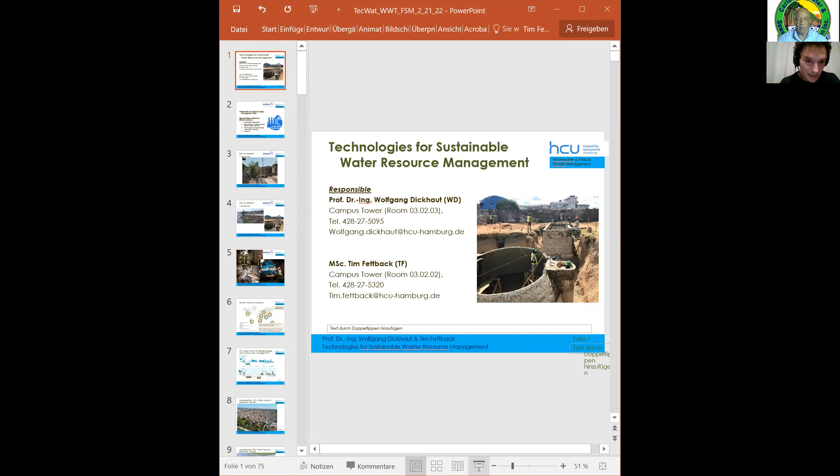I went to the HafenCity University in Hamburg, where I'm doing my PhD in relation to faecal sludge management, so the sludge which is accumulating in the pits. And there I'm thinking about the institutional and financial arrangements. So how to get the whole system more efficient, because in the end you can have a very nice technology. If it does not work efficiently and it's too expensive, it will never scale.

So the question is, how can a more efficient system, what would it cost in the end, and can this be carried by the beneficiaries, so in the end over a kind of sanitation levy or taxes. And at the same time, I'm also lecturing in a course which is called Technologies for Sustainable Water Resource Management. And I would like to present one of these lectures to you, looking into fecal sludge management, and let's see how far we get, also decentralized wastewater treatment.

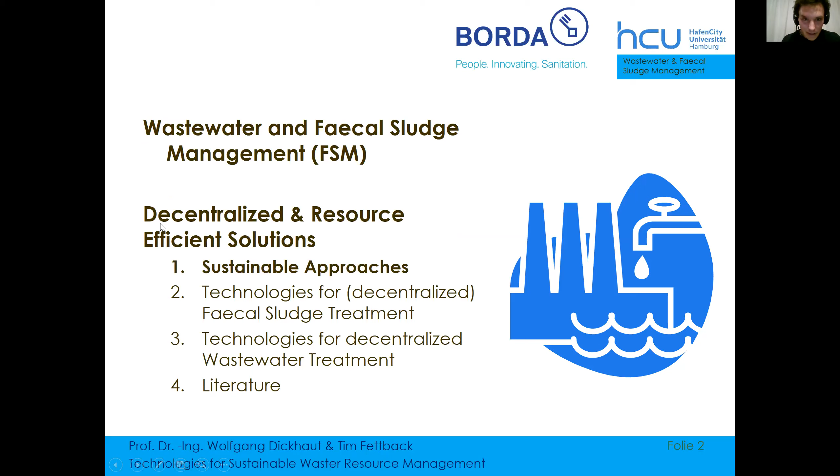So basically, today I would like to talk about decentralized solutions, resource efficient solutions. And before really diving into the solutions, I would like to talk a little bit more about general principles which we try to follow in sanitation planning. And then, of course, this reflects also to the technologies themselves and also the operation and maintenance of the systems.

So generally, you already see here the two different terms, wastewater and fecal sludge management. I can imagine most of you are aware of the difference. So fecal sludge is all that is accumulating in the pits and the containment systems on site, and wastewater is anything which is flushed into a sewer system and then treated off-site. So there we have two different technologies, approaches, value chains, management systems, institutional arrangements. So this really has to be seen as two different systems.

I just had a fast look and I saw that also in the Caribbean, about 50% of the systems are on site and about 50% are sewer systems. Correct me if I'm wrong, but then fecal sludge management is still a significant portion. And I also saw that about 80% of the wastewater is not treated, but discharged to the ocean, mainly to the Caribbean Sea. So I can imagine that wastewater treatment is also one major aspect. So I would like to start again with a picture.

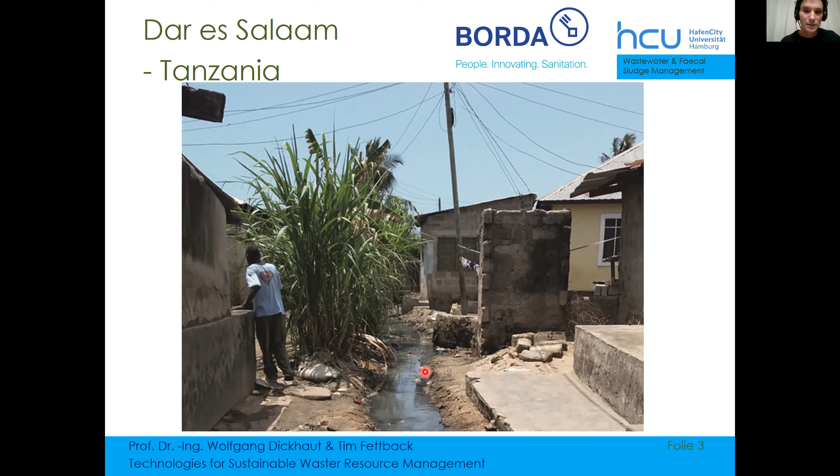You could almost say this is part of the system, because the toilets are constructed so that basically the sludge is flushed out of the system. That's one of the main emptying methods, which of course leads to a high load of organic pollution, affecting environmental health.

We'll have a lot of nitrogen and phosphate in our water bodies, leading to eutrophication. We also have organics in our water bodies, which reduces oxygen until we reach anaerobic conditions, and then the whole ecosystem collapses.

Of course, we also have exposure of human beings to pathogens, mainly from the excreta. You can imagine this is a normal road, so people walk here, children play here. So there's a significant risk.

At the same time, we also see some urban informal agriculture, some sugarcane growing, where you can see a benefit: the nutrient-rich water is a potential resource that can be used for irrigation, and then does not have to be treated to such a high level, because the nutrients are a benefit for irrigation and not necessarily to be removed, which is technically also a big challenge to get the nitrogen and phosphate out of the wastewater.

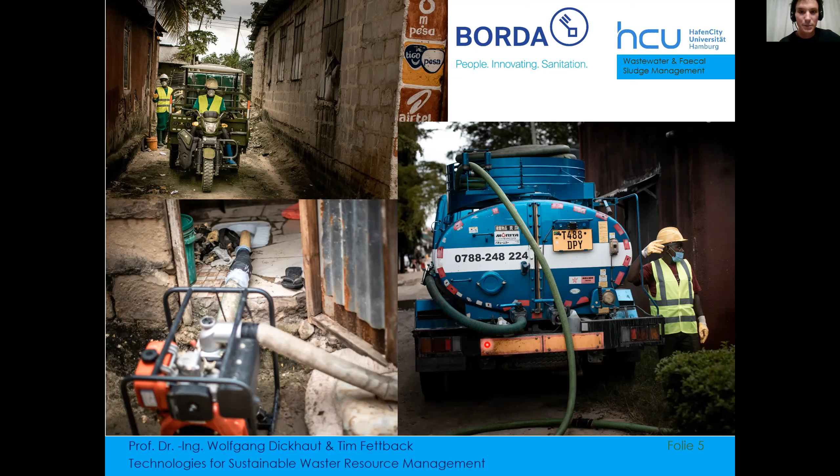Down here again, the picture of a kind of solution we are trying to implement. On the other hand, you have wastewater treatment with sewer systems, but also fecal sludge management. This is not only about the treatment; we have the whole value chain.

We start at the containment system, and then it has to be emptied. The design of the containment system influences its emptyability. If there's no access to the containment system, we cannot use a conventional truck, so we have to have other solutions.

For example, this is a trash pump, which can also pump some kind of particles, maybe 2 millimeters in particle size. There are lots of other systems as well.

But then the other issue is you have to be able to enter the containment system. Often operators get to the pits and then have no access because it was completely closed, so they first have to break the walls of the containment system to re-access it.

After emptying, we go for transportation. There are several different types. We have good experience with smaller tricycles, which can easily enter densely informal neighborhoods with small roads, and also have lower investment and capital costs compared to the sludge truck.

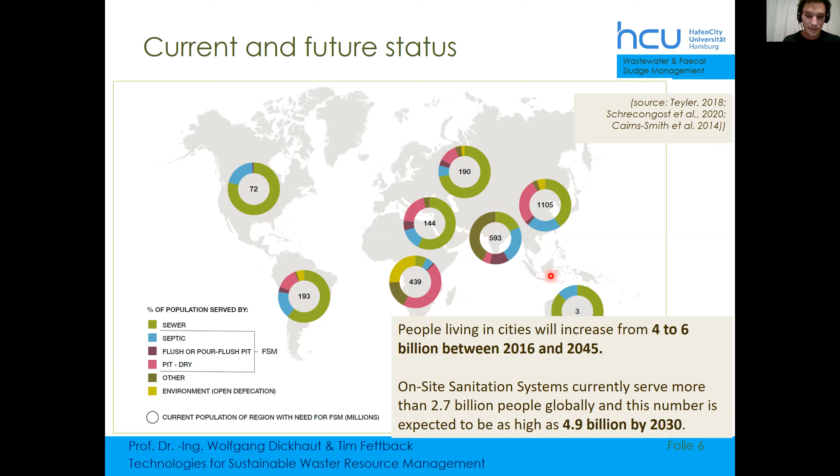They are also easily available. In Tanzania, sludge trucks usually have to be imported secondhand, which is quite a process, especially for small entrepreneurs.

Globally, we can see that on-site sanitation is the dominant system. At the moment, we have about 2.7 billion people depending on fecal sludge management of on-site systems. We still have a significant amount of open defecation and other environmental systems, especially in Africa. But the number in the middle is the people dependent at the moment on on-site sanitation systems, which is septic tanks, flush or pour flush pits, or dry pits. They all need frequent emptying of the sludge, which then has to be transported, treated, and reused. The projections show this going to 5 billion people by 2030, so we have a huge demand in the next years.

In the Caribbean, I cannot say exactly, but as I saw it, about 50% have on-site sanitation systems, and I think the population growth is not as strong. Nevertheless, it might be possible to learn from other regions. Especially, we have much experience in the Southeast Asian regions, who already started to scale up solutions for fecal sludge management.

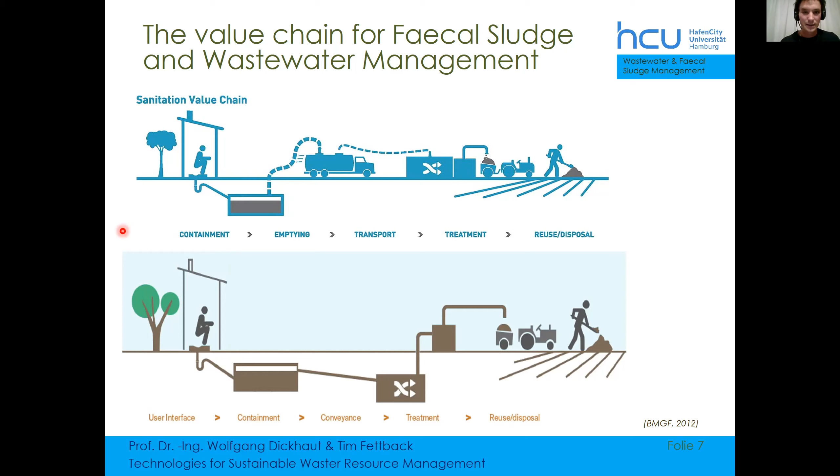If we go into the value chain of a wastewater system, we have one significant difference: we don't have the emptying and transportation, but we have a conveyance. Conventionally we don't have a containment system, but this is optional. If we have a containment system in a wastewater system, then the sludge also accumulates there, and we would need emptying and transportation again. We would have a special type of wastewater system, a solid-free system with a simplified sewer system, with a big advantage compared to fecal sludge management - a complete treatment of our wastewater. With fecal sludge management, we only treat the sludge in the end. There will always be something missing: the infiltration into the soil. So our partially treated liquid fraction of wastewater will be infiltrated on site.

This is like a first step, and it is a much more feasible step. That's why now, over the past 10 years or longer, it is going more and more in the direction of really acknowledging that in most parts, the wastewater system will not be implemented in the near future, but safe and environmentally friendly fecal sludge management is achievable and should be the first stage. If we talk about safe, of course, we try to reduce the risk for the environment and the risk of any contact with pathogens and human beings.

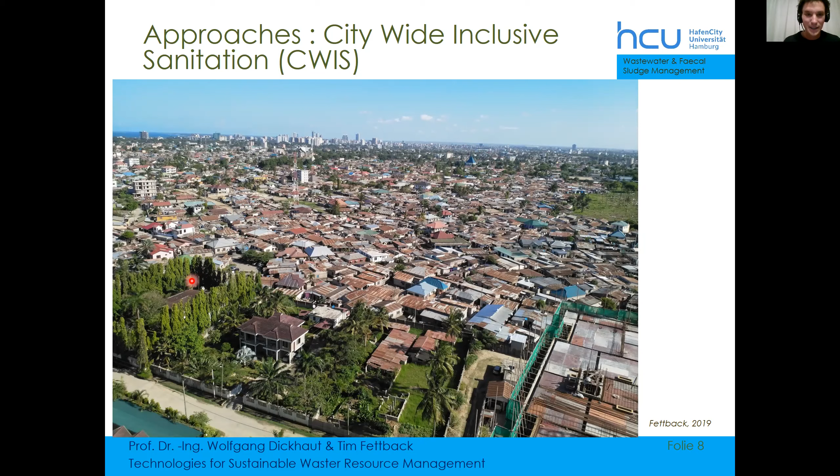But this is a very small part of it. From here, there are some sewer systems which bring wastewater untreated into the ocean. Then we see the informal settlements in the foreground, basically a residential area, though there will also be some small medium enterprises in it. We see that accessibility is very difficult, so there might be one road going somewhere, but we can't even see it anymore.

A truck can pump the sludge about 50 meters, maximum 100 meters. How will a house which is more than 100 meters away from a road be served?

We also see that there will be quite a variety of income. Here in the front, there's a reasonably large building with a beautiful plot. This people might be of higher income compared to just the neighbor behind them. At the same time, they are directly at the road with nice access, so a sludge truck would have an easy job entering and emptying the pits, even though this one might also not be connected to a sewer system. Having that access is easy, the costs for serving are low, and at the same time the ability and willingness to pay are also quite reasonably high.

As an expectation, we also see something like a church here. How is wastewater generated at the church, and how do we provide toilets here? We see a cemetery, which might also have an impact on water quality. So you can imagine how many different entities, stakeholders, and interests we have here that need to be aligned.

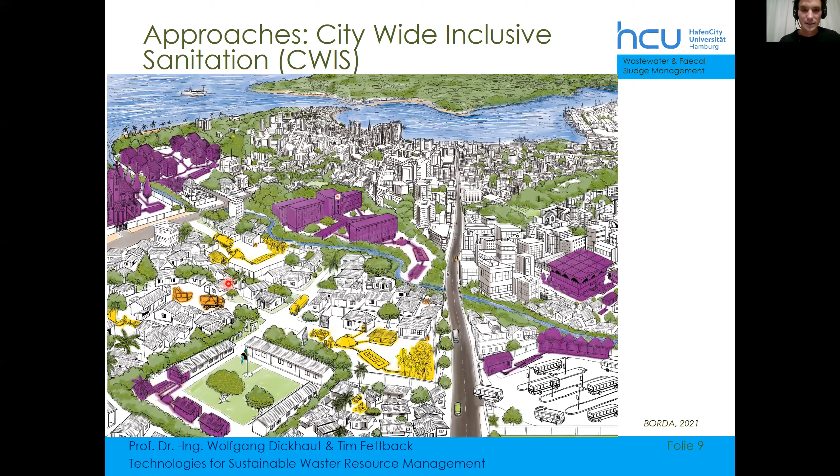Coming back to fecal sludge, we can imagine how big the variation is of fecal sludge which gets to our treatment site. Depending on where it is collected—say at this bus stand, there's no decentralized treatment plant, only a pit or septic tank—the sludge collected here stays a very short time in the containment system. So basically there has not been much decomposition of the organic matter before it is emptied and transported to our treatment plant.

We might have other systems which are not lined, with good percolation into the ground. These containment systems might fill up only after 10 years, and the characteristics of that sludge are then quite different—the organics are already quite far decomposed, while the COD, the difficult or slow degrading, not biologically decomposing organics, are still in our sludge. This has, of course, an impact on our treatment system.

As I mentioned before, if there's solid waste going into our sludge, or wrong management of the toilets—for example, we observe salt or even battery fluid being put into the pits because it is believed, or partly true, that it reduces the smell—we can end up with heavy metals or salt in our fecal sludge, which has a big impact on the biological treatment systems we implement.

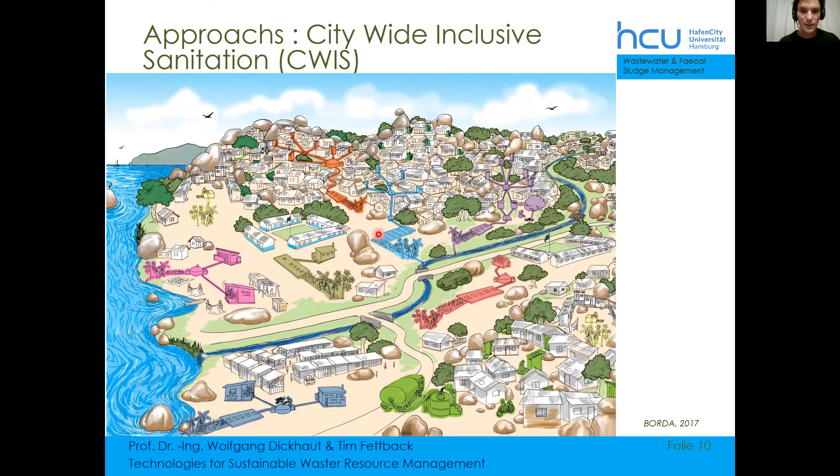Other options could also be something like a simplified sewer system, which connects several households, simplified in a way that it's not too deep—a shallow system that operates without any electrical energy, so no pumping required. We can also think of having a settler at a reasonable, accessible place, from which only the liquid continues and gets treated at a lower level, while the sludge accumulates there, and the sewer system following the settler can then be even more simplified.

Again, similar principle, looking at different types of discharge. So having something like a constructed wetland, maybe also an irrigation, and it can have an overflow to a water body, although we always try to avoid any discharge to water bodies, because once we discharge to water bodies, the requirements for the effluent quality is of course much higher. And if we can reuse it on site, we always try to do that.

And in the bottom corner again, the fecal sludge management for areas where no sewer systems can be implemented. Of course, one major criteria for sewer systems to be implemented is also the water supply. So if there's no water supply, then better to go for dry toilets and to save the water.

And actually here in Mwanza, they had a quite good concept also for recovering the costs. So the hilly areas were not yet connected to water supply. So they went directly hand in hand and said if any household wants to be connected to water supply, they also have to be connected to the simplified sewer system. And they directly from the beginning also collected a sanitation levy. So on top of the water bill, a certain percentage was added for the wastewater management.

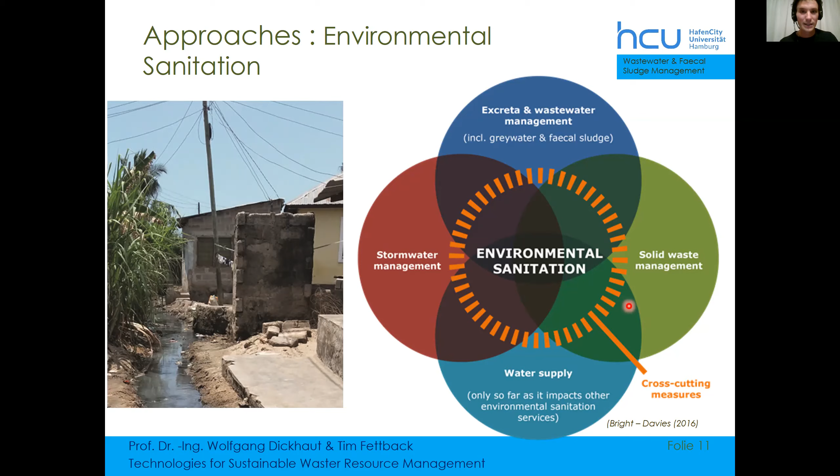Stormwater is a topic which will get more and more attention in future, as flooding will really impact most of our urban areas. So stormwater will have a significant impact on our wastewater infrastructure, but for sure we should also manage it separately from our wastewater. So we always try to have pure wastewater and pure stormwater treatment, and always avoid connecting any stormwater drains with the wastewater treatment, because then basically we would treat clean rainwater.

So also here in the stormwater management aspects, we look much into decentralized solutions and not only the drainage of the water to any receiving water body, because that would then lead to flooding downstream. And yeah, a big other topic, maybe we'll have one lecture or one exchange on stormwater management, but here we much look into this concept of water sensitive urban design. Basically also again looking into what are synergy effects, what are potentials on site, and also looking at the co-benefits, for example, cooling because of urban vegetation.

Yeah, and also already the linkage to solid waste I already mentioned. During floods, solid waste gets transported into the environment, gets transported into our sewer systems, leads to clogging, leads to pollution of our receiving water bodies, and other way around, solid waste itself can also lead to flooding.

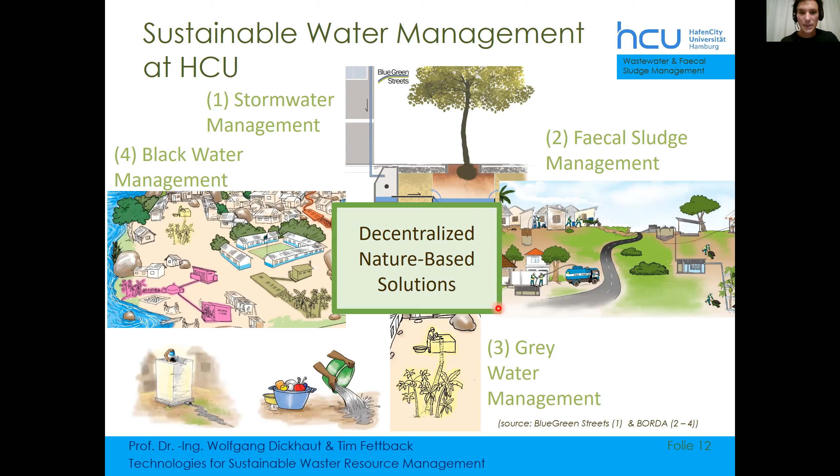Here at the university at HCU, we are looking at, we are actually a quite small team, but we are trying to cover different topics. But one of the main topics is the stormwater management and the water sensitive urban design. Here just as a symbol, this infiltration pits looks simple, but once you go to the implementation, it gets quite complex, especially going to the scaling, so that these systems are really implemented at scale.

So there's also a big topic in European cities at the moment. In German cities, 50% of the trees in the towns are actually suffering under stress. So they have drought issues in summer, and at the same time in the same summer we have flooding issues. So the droughts are increasing, but also the extreme rainfall events are increasing, and they are in the same summertime.

But our systems are designed in a way just to discharge the water out of the urban area instead of keeping it in the soil and making it available for trees, for vegetation, which can then evapotranspirate it and lead to cooling of the area, for example, but also providing space for recreation and other aspects.

We look at decentralized black water management, we look at fecal sludge management, which is mainly me, and we look at gray water management. So really also at the separation of the streams. For all of them, we basically mainly focus on decentralized and nature-based solutions.

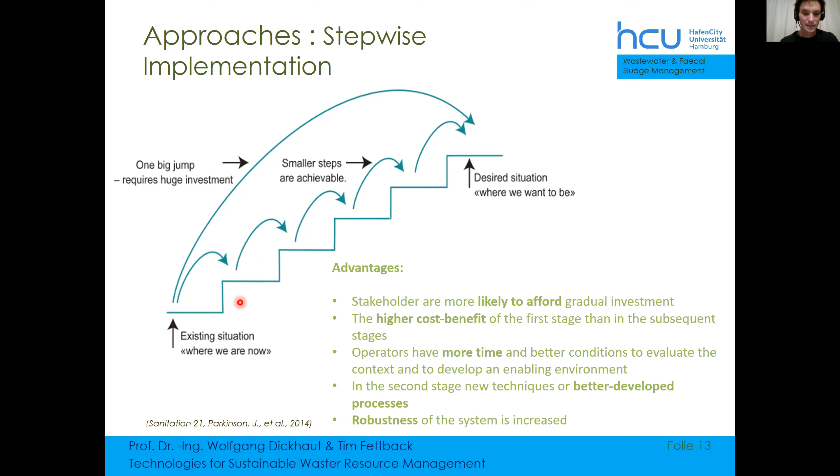It is difficult to plan. It needs a lot of finance. We need an enabling environment with skills and capacities. We need the financial arrangements. We need the right legislation. We need the acceptance of the population, and all that is very difficult to have in place for a big step in the beginning.

On the other hand, we see that the first steps are usually more effective than the last ones. Reducing organic pollution in our wastewater is easier than reducing nitrogen. Reducing phosphates is even more complex, and reducing micropollutants is even more complex, and disinfection also. So the first stage is usually the easier one, but already has a big impact. So we get more effect for a certain cost.

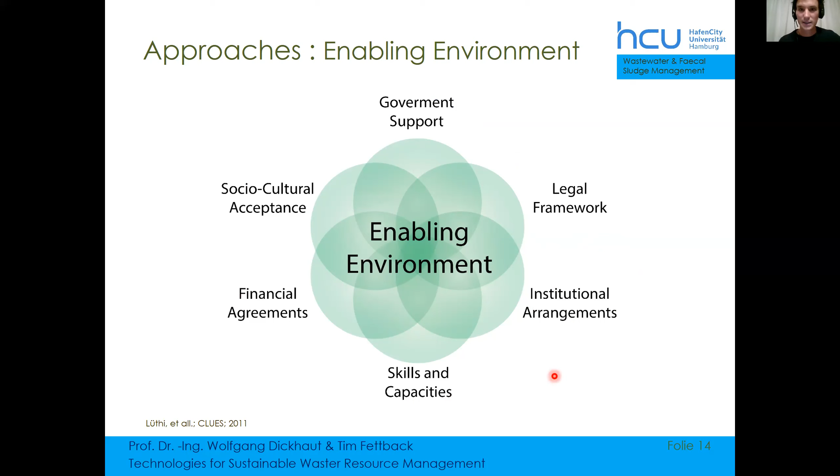And this other idea of decentralization, having several small systems, does not really require much more time if they are implemented in parallel. So the first stages might be slow, but then it can scale quite fast if they are implemented simultaneously in several areas. But we maintain a robustness, because if one system fails, not the whole system fails. So if one system fails, we learn out of it, and while implementing the next one, we can improve. And this gives us a certain type of robustness.

I already mentioned the enabling environment, a very central part of any scaling process and technology selection, concept development. So either we find a solution which fits into the existing enabling environment, or we identify the weak points in our enabling environment and try to develop it. So if, for example, legal frameworks have certain gaps, which are barriers for the implementation of any improved system, then we might first want to fill this gap and get a better legislation in a specific aspect before implementing a system.

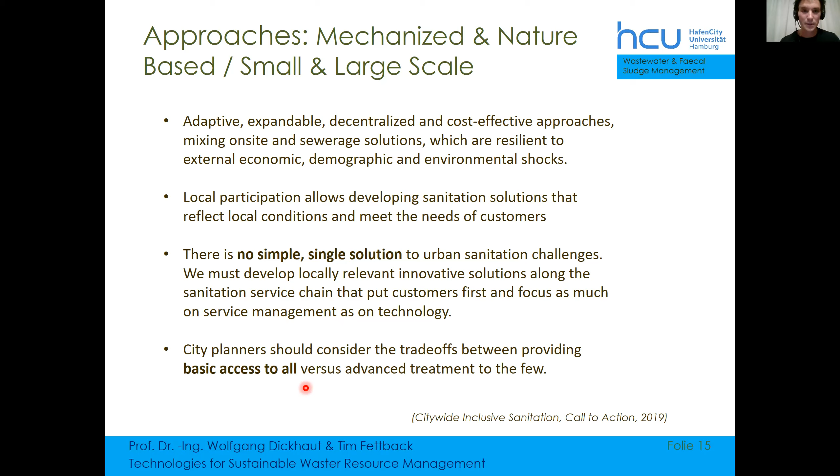So summarizing some of these approaches, we need adaptive, expandable, decentralized and cost-effective approaches, which are not only on-site, but also include sewer systems. There are areas where sewer systems are appropriate, and areas where on-site solutions are appropriate. And all this has to be resilient to economic, demographic, and environmental shocks, as we are implementing it in a very dynamic situation with these fast growing urban areas which go through a lot of development.

Any development and any implementation, of course, always has to be done with local participation. They have the knowledge on the ground, and we have to fulfill their needs. So without local participation, this will never be successful. There's no simple and single solution for any of the urban sanitation challenges. We always have to look holistically at the enabling environment and try to find a solution which is contextual, which fits into the specific context where we are.

And then we have this question of either basic access to sanitation for all, or at least for a large part of the population, or very advanced treatment, advanced sanitation solutions for a few. And actually at the moment, we are more on the side of advanced treatment for a few and very low services for the majority of the population. But we should get more to a basic access for all or for a majority of the population. I already mentioned the government support.

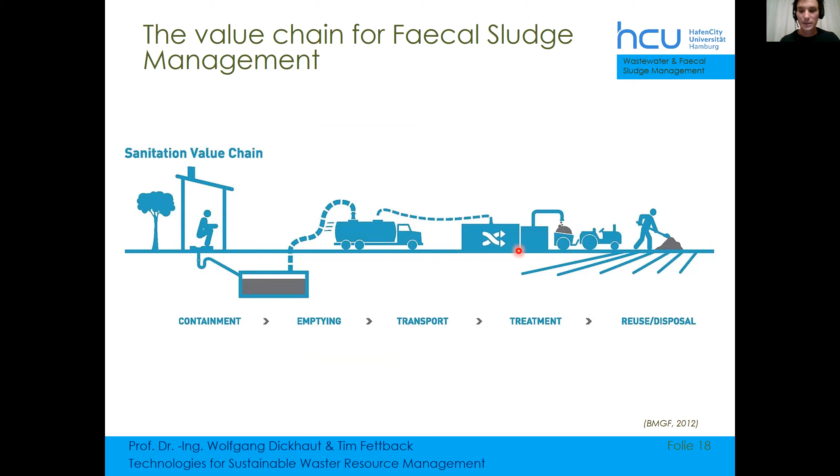I don't want to talk much more about that, but for any change process to be efficient, to be effective, to really get to the aim that we can get to a scaling, government support and the political will are of course 100% required.

And you can see this in just two examples. One, the Swachh Bharat mission in India, where millions of household latrines have been constructed by the government, not only providing financial support, but also doing national behavior change campaigns. And something similar is also happening in Tanzania, which is less financial support, but more really awareness creation and behavior change campaigns.

If you have the feeling you would like to ask anything, please feel free to write it in the chat. I would now go a little bit more to the technologies of fecal sludge treatment. And I can imagine that we don't have too much time to then also go to the treatment technologies of decentralized wastewater treatment, but I think they are very similar, as I would mainly talk about the DEWATS system.

Again, the value chain. So we'll go slowly through it, as you always have to design the entire system, and each of these different steps have to be aligned. So depending on your user interface, you will design your containment system, and you will design your emptying, transportation, treatment, and so on.

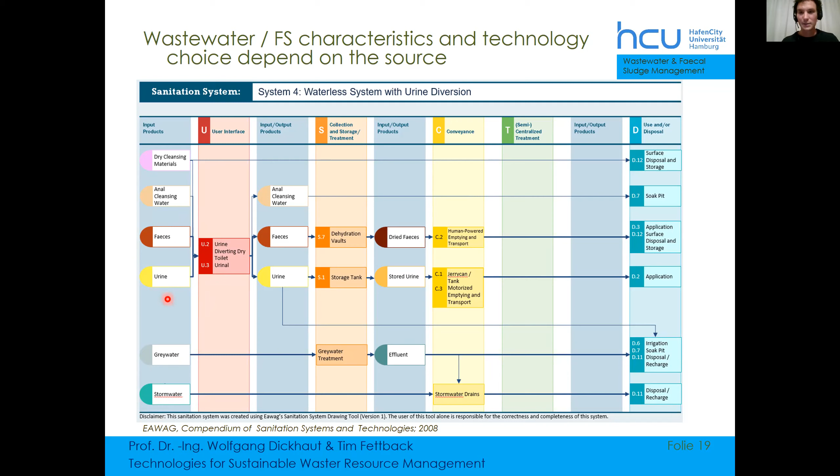A way of categorizing it, of visualizing it, and also a tool to assist the decision making for certain technologies is this quite simple tool from Eawag, a Swiss research institute which is focused on water management. They developed a compendium for sanitation systems. Many might have come across it.

And in that one, there's this tool, which is the sanitation system template, basically looking always at what goes into your system at each stage. So the output of the user interface is the input to your containment or conveyance, and the output of your conveyance is the input to your treatment, and so on. And basically there you can always decide according to your input on certain technologies, for example, for the user interface, or for the collection storage, or for the conveyance, or the treatment.

And within this guide, this tool, you will then have certain possibilities to decide, okay, if urine enters into my system, how do I treat it? What are the technologies available for treatment? If feces enter, what if gray water enters? What if I separate gray water? And this is the basic idea again of source separation.

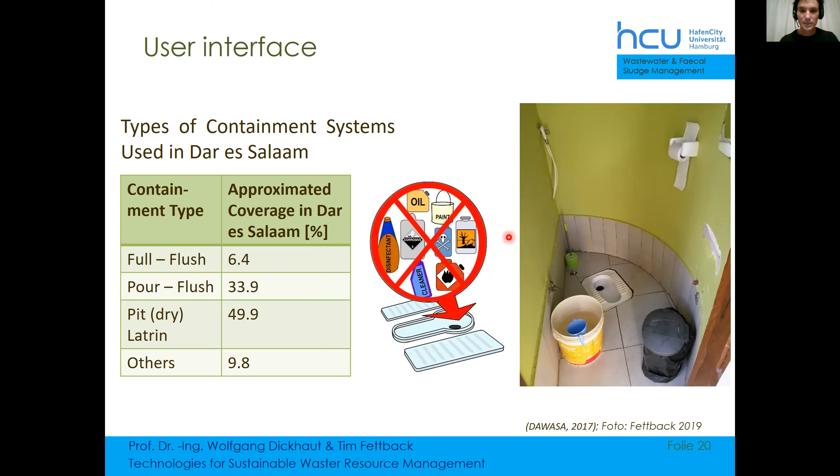If we mix all these different streams, then of course the treatment will be more complex. If we can keep it apart from the beginning, so we have a stream of gray water, we have a stream of storm water, and maybe in a very ideal case, we even have urine diverting toilets, then our treatment and our reuse will be much more simple.

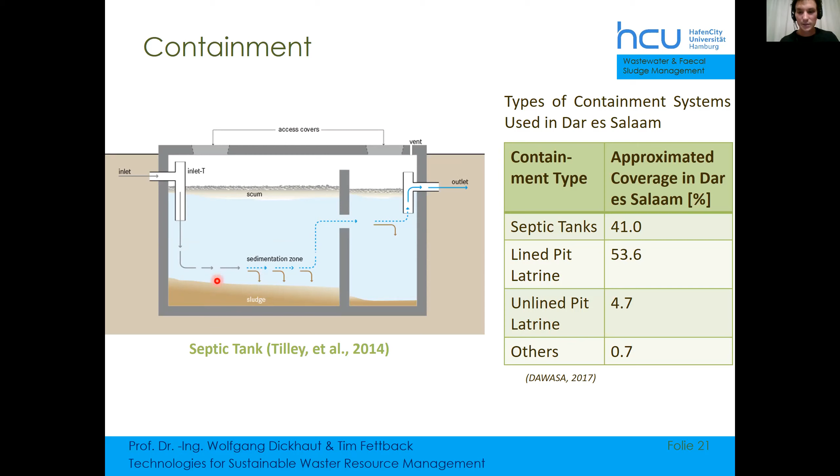Typical toilets, either you can have a user interface with a pour flush or a full flush system, or a dry toilet. And in the case of Dar es Salaam, by some estimations, most of the people have dry toilets, dry pits. Others have pour flush, and only a few have a full flush system. So here already we see, if you have a full flush system, then maybe a sewer system is appropriate. Not always, but in some cases. But for a dry pit, for sure, a sewer system will not work. And for a pour flush toilet, very certainly also not.

And apart from that, it's also very important to have management directly at the site, so that no substances which are polluting our wastewater and making our treatment complicated should enter. And this is especially a challenge in areas with a high fluctuation of users, because then any education is difficult, like in a hospital or public toilets or similar.

Next step is a containment system. This is now a septic tank where you have some sedimentation, pre-treatment, anaerobic processes. Of course, also emission of greenhouse gases, anaerobic digestion of organics leading to methane. And we have the outlet, which is then the infiltration to the soil, which still can lead to environmental impacts, as this will be nutrient-rich water going into our surroundings, and also not disinfected water. However, most of the contaminants stay in here, and this then accumulates and has to be emptied after a time.

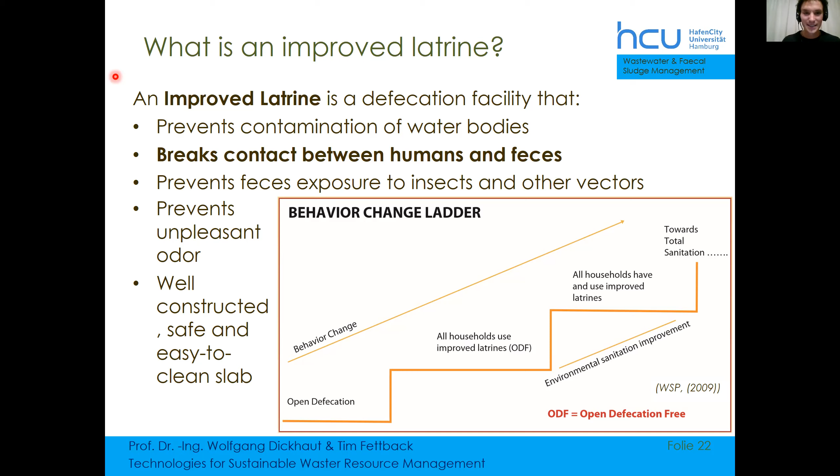Business models exist for emptying and transportation. I can imagine also in the Caribbean, sludge trucks are operating, vacuum trucks are operating, but usually they then discharge in places which are either very subsidized, so discharge in treatment plants where they only have to pay a very small amount, which does not cover the costs of the treatment, or discharge illegally. So having a full value chain with cost recovery is quite a challenge.

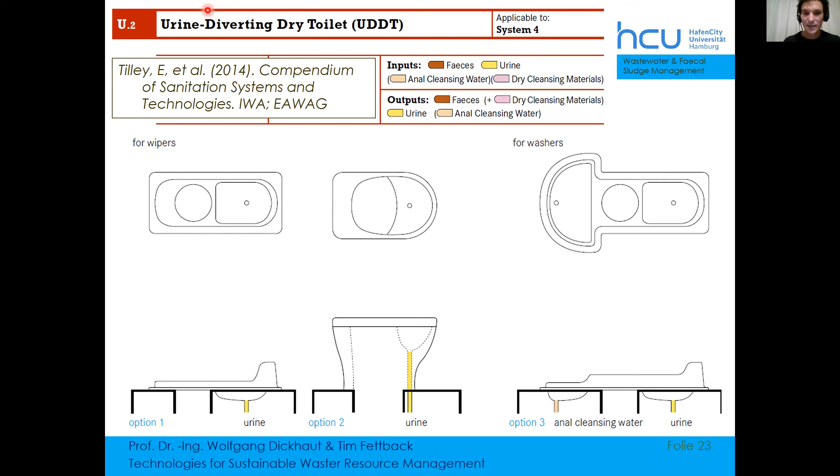However, it's possible if there's some other way of collecting the fees. So one is, for example, over the water bills. Another one can also be over property taxes, and then costs and income. So reducing the costs, as I mentioned, for example, reducing the distances between the treatment plant and the containment systems, having scheduled emptying. Scheduled emptying means that it's not on demand, not only if the pit is full, someone calls, and all the rest of the time the trucks are standing and waiting for customers, but it can really be planned: in this time of the year, we will serve this area of the city.

This requires a lot of management, and is also not easy to implement, but there are good case scenarios, best practice examples from India, from Malaysia. This really reduced the costs significantly. These are just some ideas.

Thanks for your question, by the way. Thank you.

So technologies, urine diverting, as I mentioned. A benefit of this is that the urine is the one which is full of the nutrients, and the feces is the one which is full of the pathogens, talking in general terms. And so if these are separated, we can treat them accordingly. And at the same time, if this is a dry toilet, we don't mix it with all the flushing water, and then we have much less volume which has to be handled.

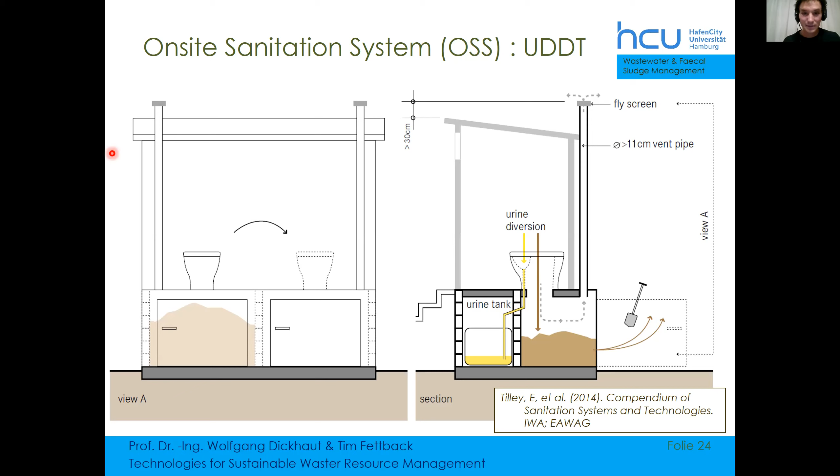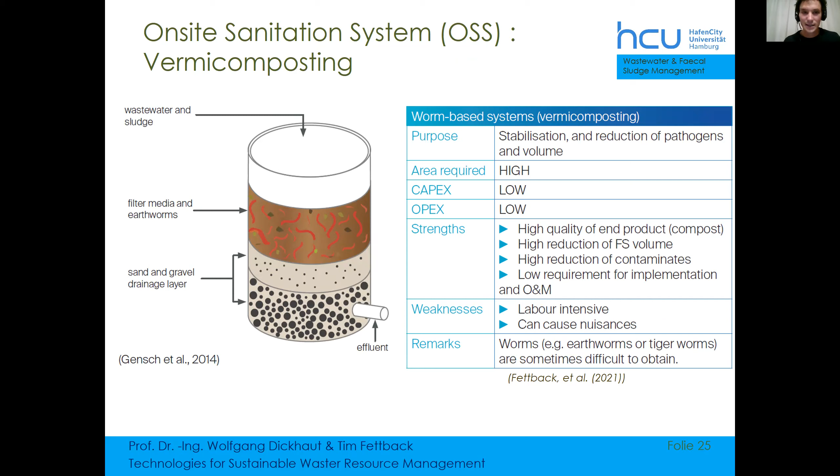So I think aeration, yes, if these are the aerobic treatment systems, they of course need electrical energy. That's why we more go for anaerobic treatment, which does not require electrical energy, but it requires more space. So it depends if there's space available or not in some circumstances, but that's usually more related to decentralized wastewater treatment.

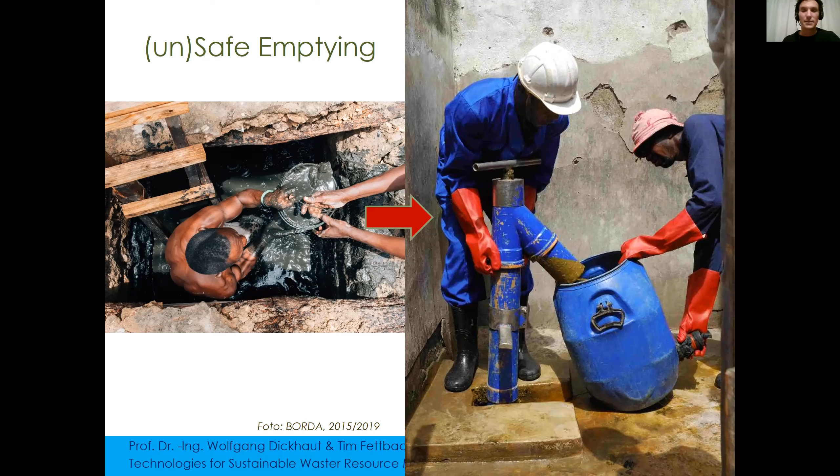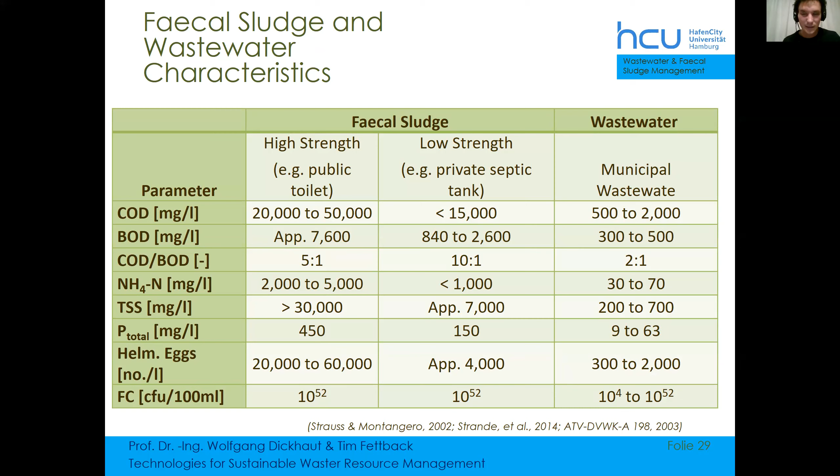Mechanized systems are the more efficient ones, so of course it always has to be done with a good calculation over a reasonable time horizon - what are the operational costs, what is the upfront investment. There are also systems in Indonesia where mechanized treatment plants actually operated at lower costs, but these are like some exceptions. They operated at lower costs because they could be implemented very close to the producers of the sludge. So they had less costs for transporting, more costs for treatment, but there the business model was better.

But with mechanized systems, of course, you also need more capacities for operation. So you need an operator who is very well trained. If the mechanized parts have any issue, then it might require some time to repair them, and so on. So this increases the complexity.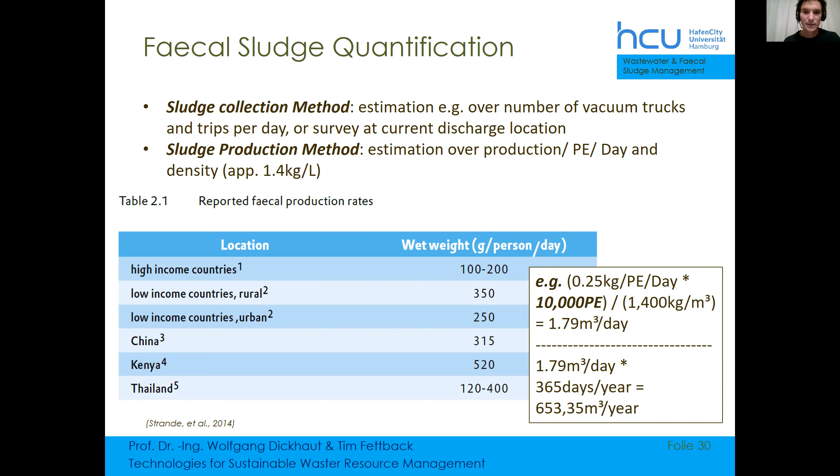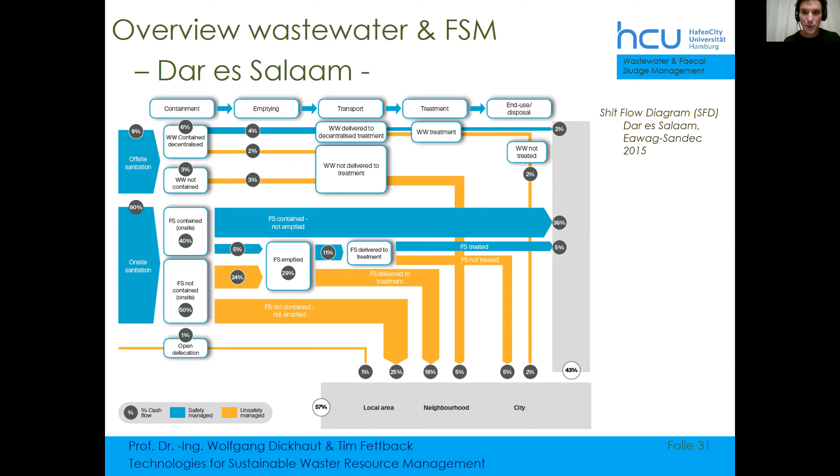Just again pointing out the difference in characteristics between wastewater and fecal sludge, and knowing that wastewater is more homogeneous. Fecal sludge can have huge diversity in its characteristics. That's about the quality aspect, and then about the quantity - fecal sludge is also highly dynamic.

We generally use a collection-based method, looking at how much is being collected, how many trucks we have, how many trips they do per day, which volume they transport. Or we look into production and estimate how much a person produces per day.

There's also a way of visualizing the whole system with a so-called shit flow diagram. This is really a serious tool you can look up, where you can see which part of the sludge or excreta is managed safely at which point of the value chain. This is really good to identify some of the bottlenecks and major challenges.

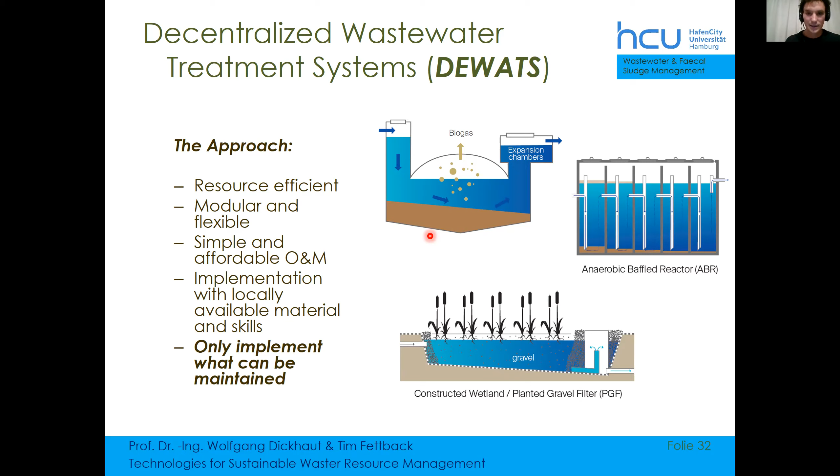So basically, reuse as much as possible, don't use electrical energy, avoid pumping wherever possible - it really flows by gravity. Don't have an aerobic system which requires aerators, and have a modular approach which can be adapted to the requirements and the ability to pay. If there's little ability to pay, you can start with pre-treatment and some primary treatment, but might leave out the secondary or advanced treatment.

So it's simple to operate, as these are mainly cleaning tasks, looking that there's no clogging. For example, if there's a lot of oil in the wastewater, this can accumulate at certain parts and lead to clogging, with solid waste causing challenges in the system. We need to desludge here too - the sludge accumulates but is basically decomposed by the microorganisms in our biogas digester. This is a biological treatment, but after some time the sludge has to be removed and further treated - these are some of the operational tasks.

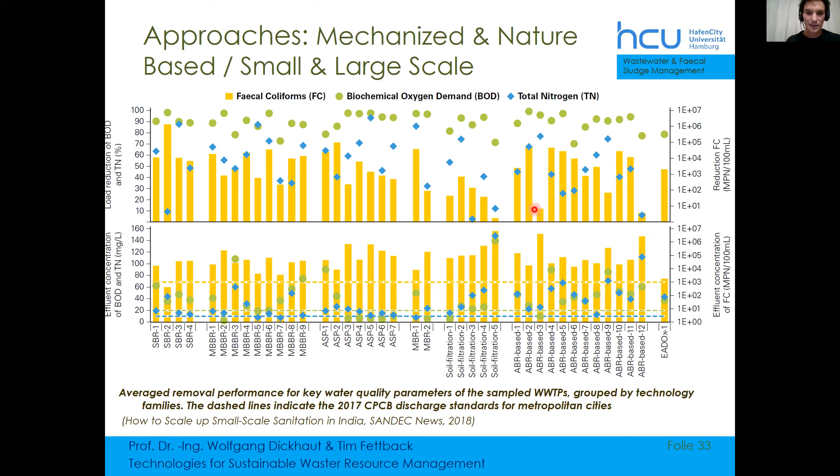It can be implemented in, I would say, any country with locally available material and locally available skills - a trained mason can implement the systems. The basic approach is that anything implemented should also be operational and maintained, so we always think of operation and maintenance before implementing anything.

Here's an overview from a study done in India a few years ago, comparing many different systems, from very mechanized systems like activated sludge process, SBRs, MBRs, but also comparing them with soil-based filters or ABR-based systems like the DEWATS approaches. The takeaway lesson was that more or less they all had the same effluent characteristics, although some systems were designed for nitrification, denitrification, and phosphate removal.

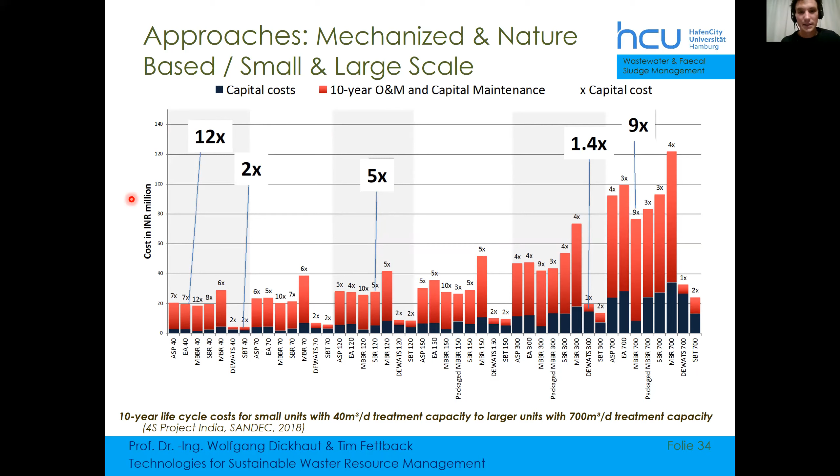But after certain years of operation, the complex systems just failed because, for example, there was no fund available for maintaining them, or no fund available for electricity. And then if the blowers and the aerobic system are turned off to save electrical energy, because there's no monitoring or control of the systems, the nature-based simple solutions end up having the same treatment efficiency.

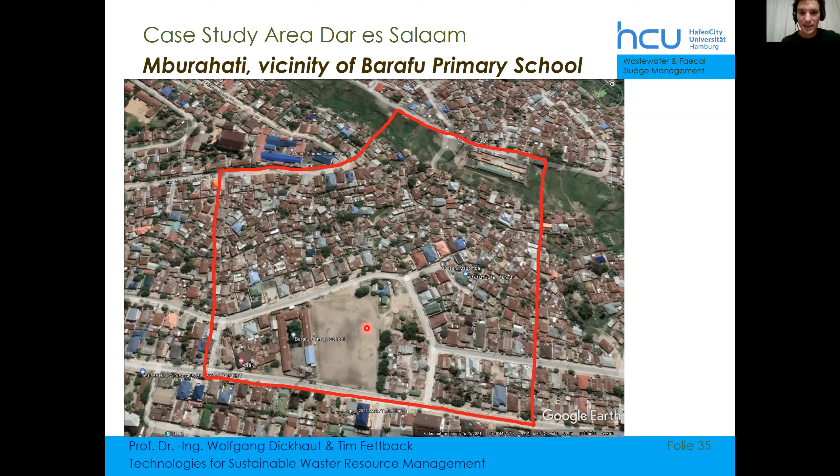If we look at the costs, comparing the same systems at different sizes - more to the right are the large-scale systems, and at the left the very small ones - we see the different technologies: activated sludge process, MBBR, SBR, MBR, DEWATS, and soil-based systems. These more nature-based systems are not necessarily much cheaper to implement, but much cheaper to operate. The red is operation and the blue is implementation - so capital costs may be the same or lower for these simplified systems, but the operational costs are much lower.

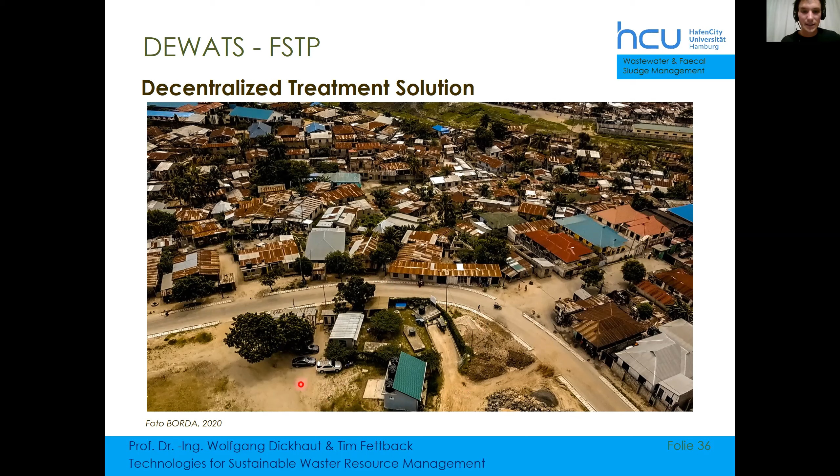So if you look at the balance over 10 years, there's a significant difference. This is again the takeaway of the stepwise approach: if we want to provide a solution for all, we can go first for a not very high treatment efficiency, but better implemented for a large part of the population, rather than going for very high treatment efficiency and implementing this only for a small part of the population.

And this is again the case study area, like where I showed the pictures in the beginning. This is called Mburahati in Dar es Salaam. You can see it's kind of informal in the background, and behind here was also the picture from the flooding. It's not very visible here, but there's quite some slope, and this area is also prone to flooding, and it's very difficult to access.

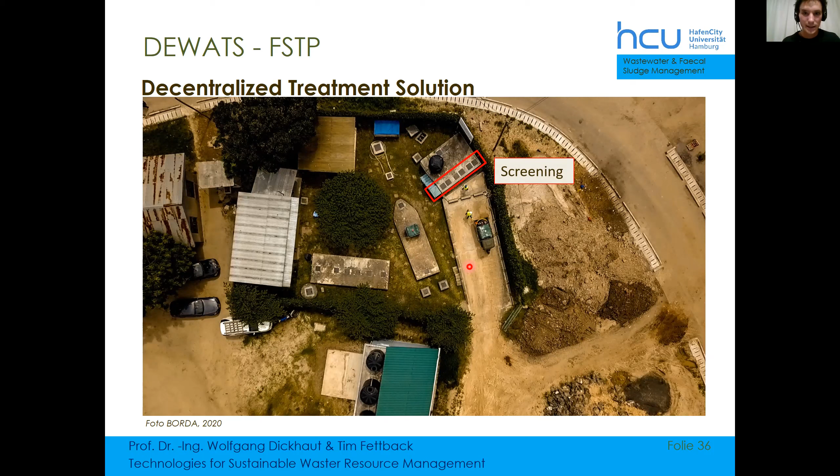So the first row of houses is accessible, and everything behind there is really difficult to access. There's a school, a playground, and some small businesses, and this is the local government authority's office, and this is the treatment plant, the fecal sludge treatment plant, which was implemented basically in the middle of the community - really in the main plaza, you could call it.

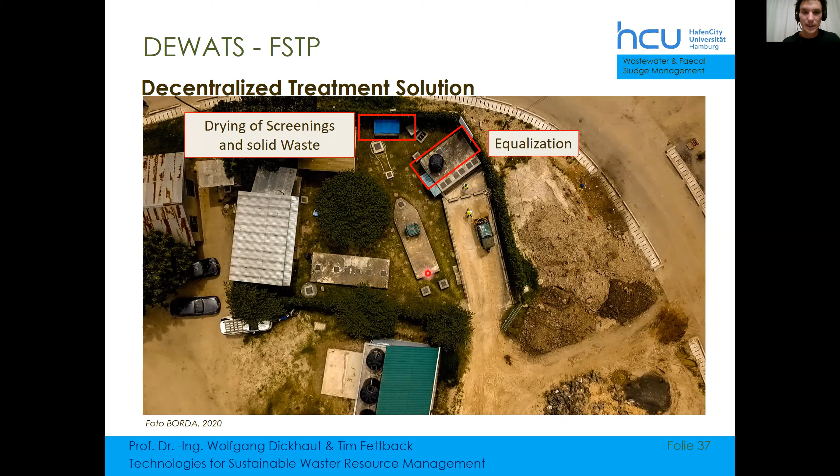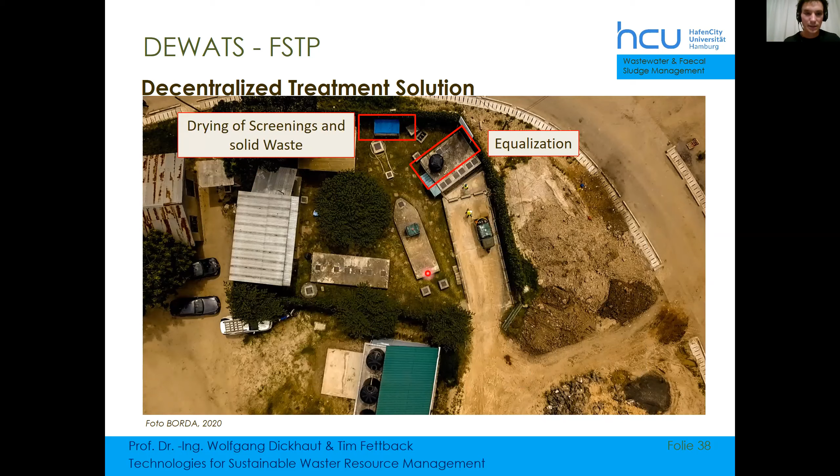You can imagine the resistance of the population against this treatment plant, but in the end they accepted it. The one big milestone for this acceptance was to bring representatives from the community to existing treatment plants, because most people could not imagine how such a treatment plant looks like. They were imagining stabilization ponds or other systems which have quite a nuisance. But this DEWATS, as I mentioned, is underground - there's no nuisance, you don't smell it, you don't hear it. After seeing it, there was an acceptance for it.

I would like to go through it very fast. You see here the small tricycle bringing the sludge to the treatment plant, and there we have a screening unit inside. It's all covered, it's all closed, so as to control the vectors - flies cannot go in and then go out and sit on the food of anyone eating in the surrounding. So here we have screenings inside to take out especially the solid waste.

It is also controlled so that during discharge it can go through the small holes - the pipe can be connected there. And then there's an equalizer. Basically, because fecal sludge comes in batches and charges - there could be 1 cubic meter or even 10 cubic meters if a truck comes in one go - this has to be slowly released into the treatment plant.

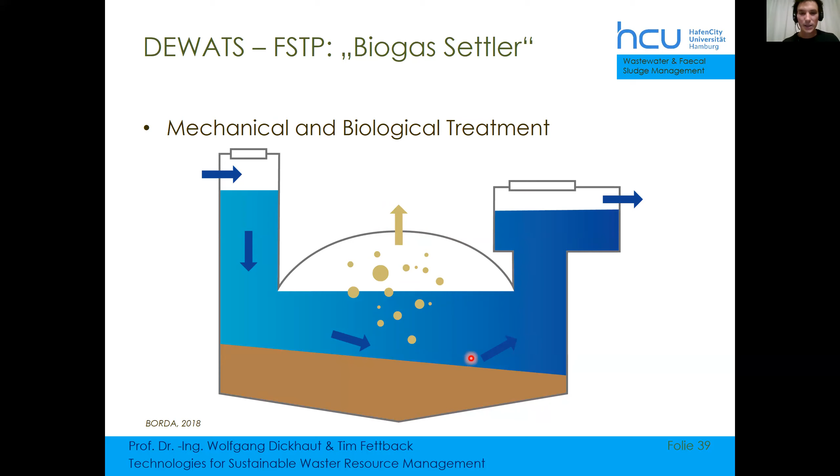There's a simple drying place for the solid waste, which is also covered so that flies cannot go in and out. And then we have a biogas settler, which is underground. Basically this is how it looks like under construction - it's a dome shape.

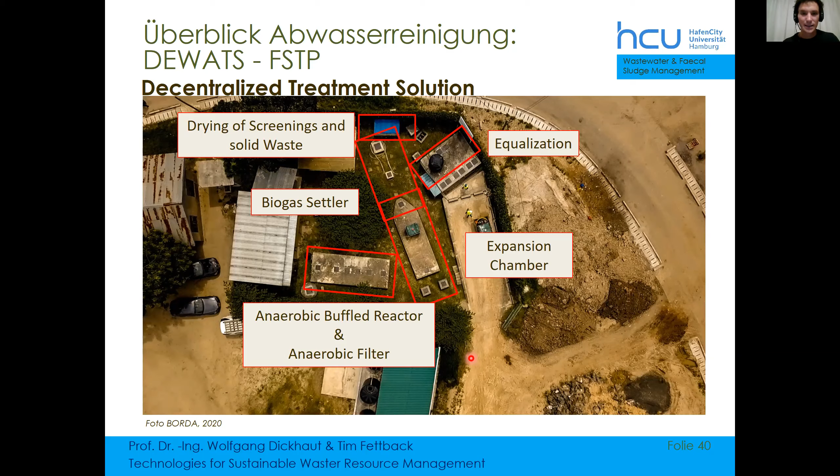And then this is later, and in the background we can see an expansion chamber. So basically the expansion chamber would be this, and then this is the inlet, and this is the dome shape, and the sludge goes in.

There's also solid-liquid separation, the first part of fecal sludge treatment. So the solids sediment, and they also mix up with the accumulated biomass. The biomass is the microorganisms which have been in there, which feed on the organics provided by the sludge. Because these microorganisms eat up the organics, they decompose it, and their exhaust gas is mainly methane, biogas.

This can be collected and stored here. Having an expansion chamber means basically that if biogas is produced, it accumulates here and pushes the water out to the outlet. But if you consume the biogas, water has to flow back into the system. Here we have a water column - we can have an 80 centimeter water column, which creates enough pressure to eventually use the biogas. At the same time, this also leads to mixing again of the fresh sludge and the biomass.

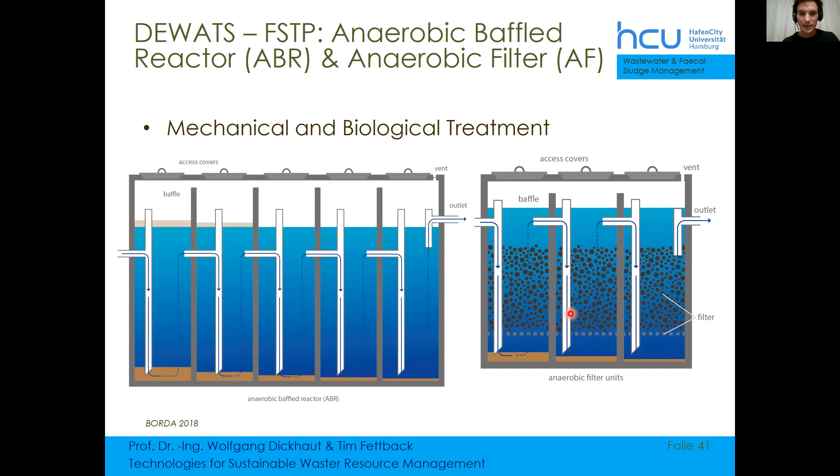Here we mix the biomass again, not the fresh sludge, but the biomass, the microorganisms which eat up our organics. We mix it with the solids still present in the effluent, and they get in contact and can eat up the organics. This we do several times, usually up to three times.

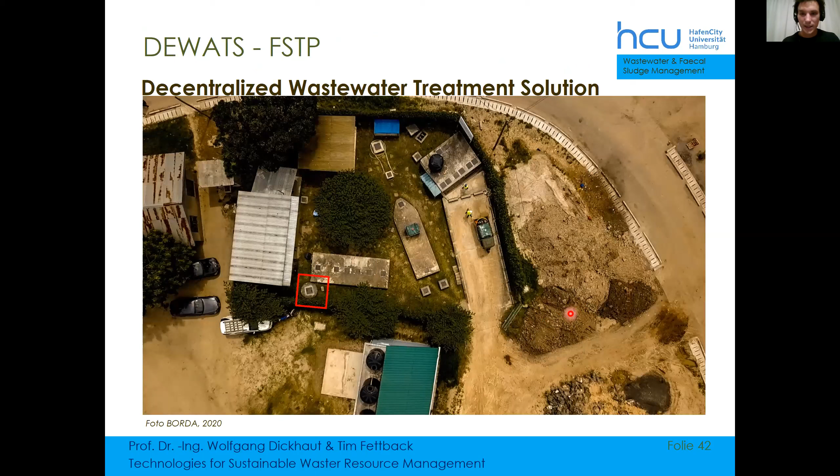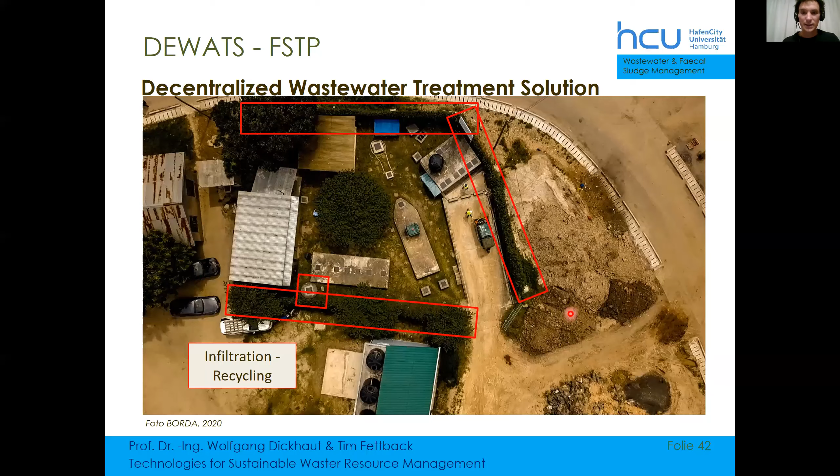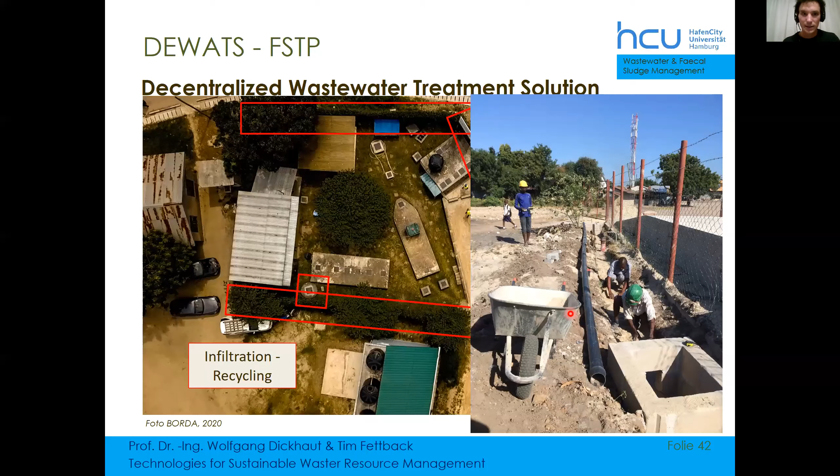Then we go to a next stage, an anaerobic filter, which is actually not a filter but a reactor which provides area for sessile biomass, the biofilm on any growth material. This can be stones, coconut husk, or plastic material, which provides a large specific surface area for a biofilm to grow. So there we have a different type of microorganisms, which then again reduce the organic pollution.

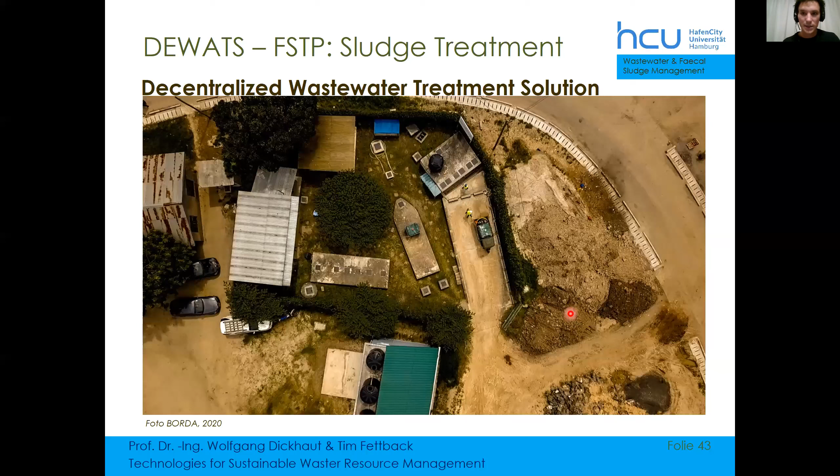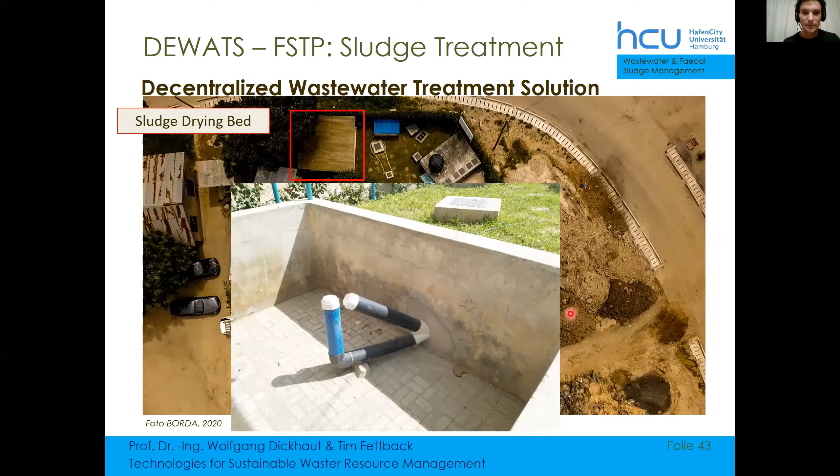Doing so, we have no nitrification, no denitrification, no phosphate elimination, no disinfection. Well, we have a type of disinfection, because for example worm eggs can sediment better. But the disinfection is minimal. Nevertheless, we reduce the organics.

And now the water coming out of there would be, under controlled circumstances, safe for irrigation, if we go for subsurface irrigation, so underground irrigation.

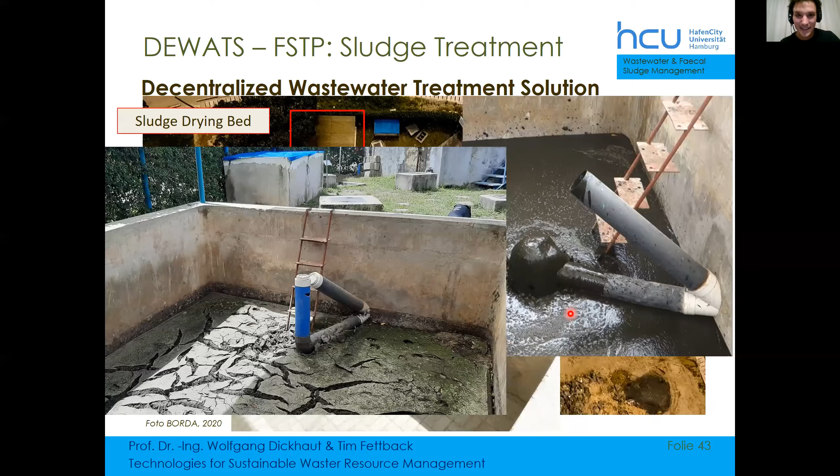I think we can see this here now. There's a distribution chamber, and from here the water is distributed around the treatment system at the hedges, but underground. These are just perforated pipes underground, and then the hedge is grown around it. There's no contact with anyone in the surrounding with this treated water, but not disinfected water.

And this has an additional benefit. Basically our treatment plant has now a nice hedge, a bougainvillea hedge, so it is more acceptable.

There's still the component of sludge treatment. So after the sludge has stayed in the digester and decomposed, it goes into a sludge drying bed, where just by gravity this blue part of the pipe can be pulled out, and the sludge comes out and dries.

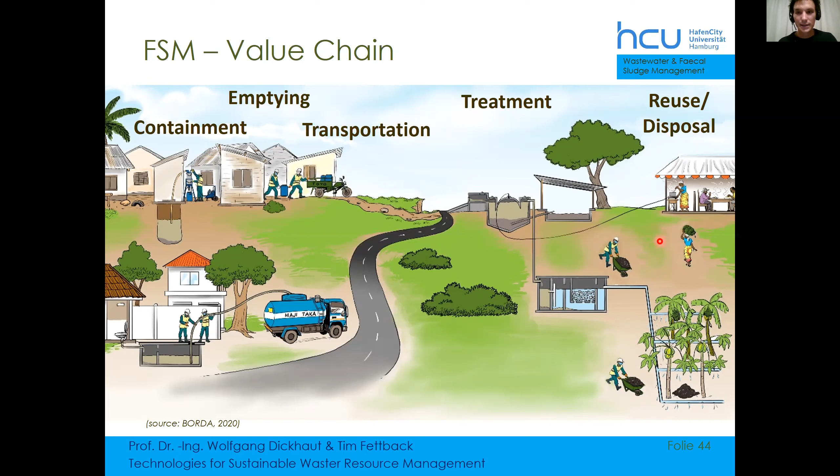This is then reduced in volume because it's dried, easier to handle, and can be brought to any controlled farming. This should still be handled, not just sold to farmers who don't know what they are buying, but if it's brought into controlled farming or landscaping, this is fine.

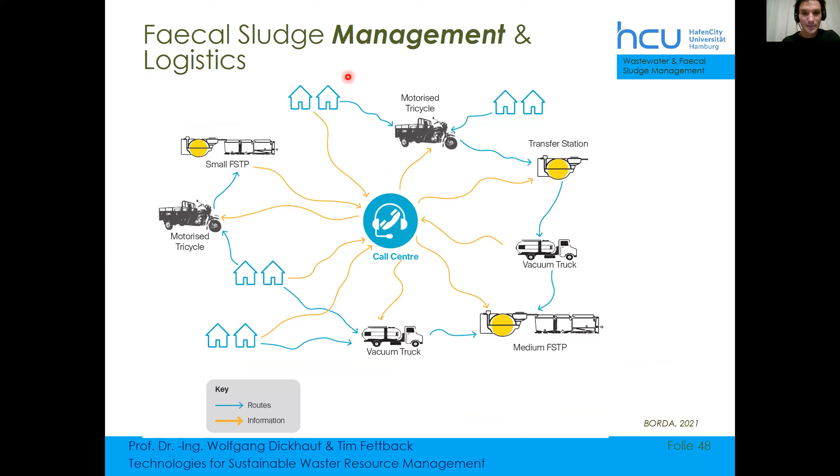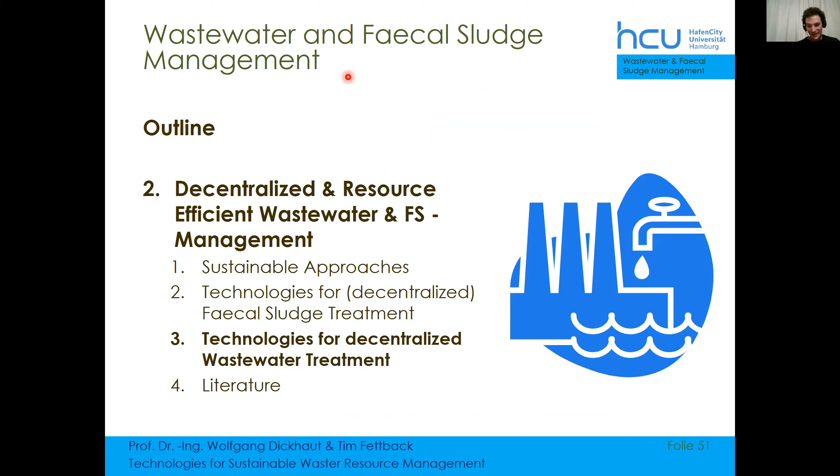Other treatment technologies are actually more on the larger scale and not as easy to implement in urban areas.

So we have again anaerobic stabilization. We have the primary receiving and also the screening. Stabilization, and then we go for the planted drying beds or unplanted drying beds for the sludge, and the effluent from here can be treated in constructed wetlands. This is more the medium to larger scale solution, but of course this cannot be integrated into the urban context as easily.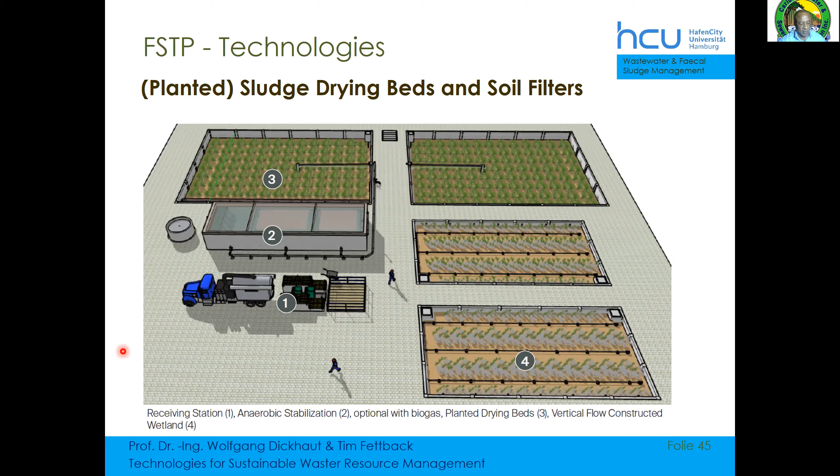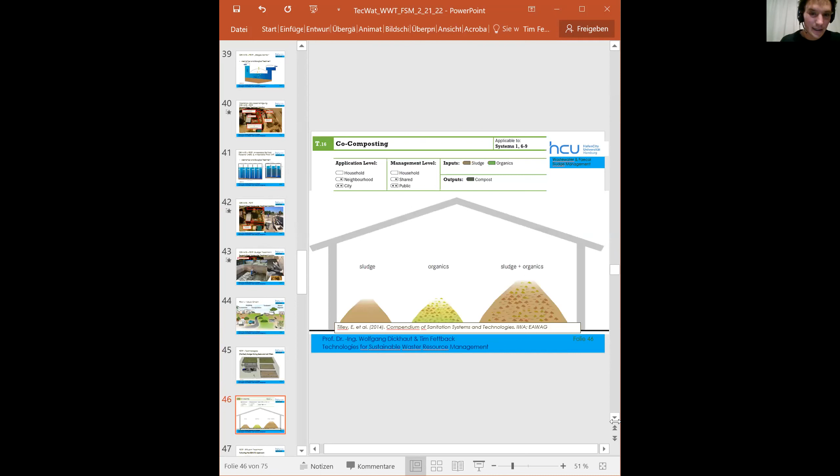There was a question from Hendrik asking about options for treatment systems for fecal sludge collected from septic tanks. Basically, this is one typical option for more medium to larger scale, not fully decentralized in the community, while the DEWATS approach is more suited for very decentralized, small-scale solutions. There's also co-composting, which is another solution. If you know the DEWATS system and this one, you're already covering the most common solutions, and both are not energy intensive, using an anaerobic treatment approach without electrical energy.

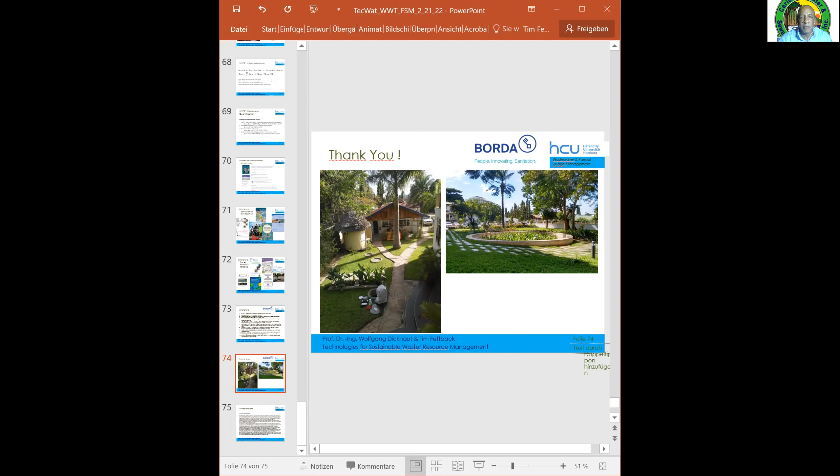There was also a question about urine separation from Shannon, I think I reacted to that one already. The other questions were all answered, Ignatius confirmed.

Okay, any other questions, participants? You've remained for a while, that's a good crowd. Thanks for your participation, and especially for your questions.

If you're interested to dig deeper, I will share the slides and you'll see the publications referenced. If you're interested in detailed design of fecal sludge treatment plants, there's a very good book on that. If you're interested in DEWATS systems, there's also one on fecal sludge management in general, or the compendium I mentioned, as well as sanitation planning guides. These are some of the key guiding documents in the sector. And of course, Wastewater Engineering: Treatment and Resource Recovery by Metcalf and Eddy, which is like the Bible for wastewater treatment engineers for any detailed design of a treatment system.